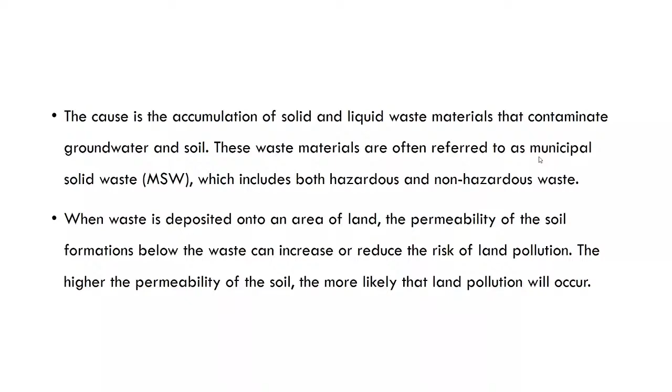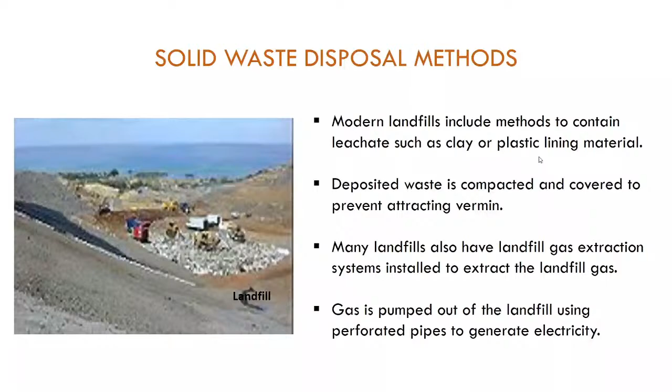Now, these are the different solid waste disposal methods which are normally adopted, polluting the land and disturbing the land features as well. One is the landfill, another is incineration, another is composting. All these three methods have their advantages, but disadvantages as well, provided they are not carried out in a technically sound manner, or not constructed in a properly designed way. Experience has shown that there is no completely safe method of waste disposal. All these forms of disposal have some negative effects on the environment, public health, and of course the local economies.

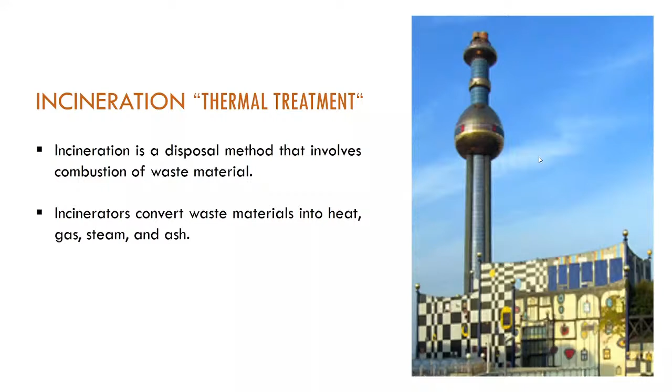Landfills have contaminated the drinking water. The garbage burned in incinerators is found to poison the air, soil, and water. The composting pits, if not made in a technically sound manner, leach into the groundwater, and contaminate the air as well. So, we need to adopt some pro-environmental practices to ensure environmental sustainability. For that, we may need to shift to renewable resources, limiting consumption of non-renewable resources. Then the environmental decisions or choices made must be of long-term consequences. Don't aim for short-term consequences or one which will fit one generation. Whatever decisions or choices are made should be beneficial for the generations to come as well.

Then, social welfare has to be targeted, not just economic welfare or the GDP, when economic and environmental choices and decisions are made. Then, the health of the ecosystem has to be protected by using products that minimize waste or are non-toxic. You can compost or anaerobically digest the biodegradable waste. You can reuse materials, either on-site, or materials could be collected and utilized for off-site recycling. So, what I mean to say is that we need to adopt different approaches for implementing environment-conscious practices that may prevent or reduce. I may not say 100% prevention. It may reduce the pollution load on the environment.

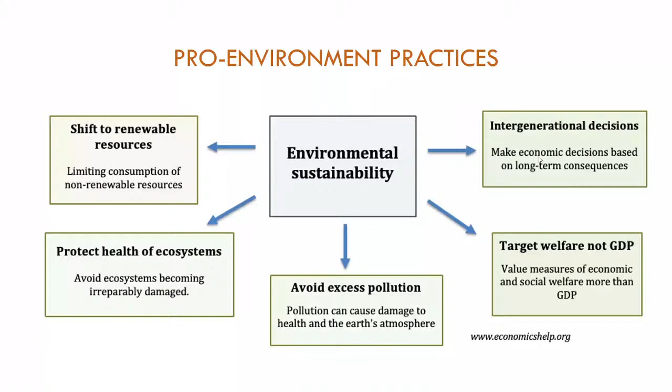The word fair is used when the product is actually serving the purpose it is intended for. Now, say for example, if you are buying sauce in a glass bottle, until the sauce is there, the bottle is serving its fair use. Now, once the sauce is finished, the bottle is a waste.

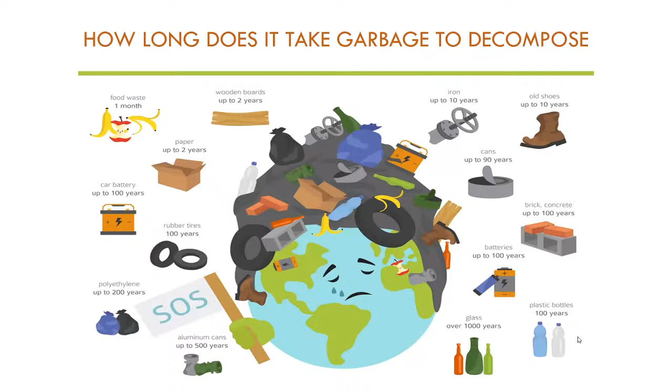And of course, at times, the research may not be fruitful because research, as they say, is just like exploring a black hole. At times, you may find the light at the end of the tunnel. Many times, you may not. But don't be disheartened. Try another path or the alternative and proceed.

At the individual level, there are many things we can do to reduce the contributions to land pollution. One of the simplest ways is, just as I have referred now, either you can reuse an item or recycle. If not for the fair use, you can put it to some other beneficial use.

And now, as civil engineers, as environmental engineers, as geotechnical engineers, if you are looking to make a difference on a community level, if you have to make some contributions to society as researchers, you can do many researches and become an environmental steward in your neighborhood.

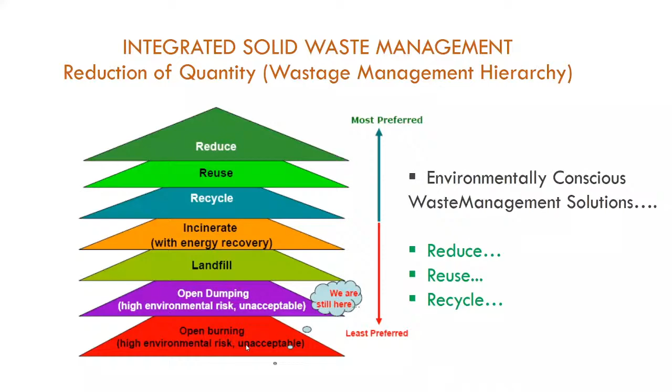Now, as civil engineers, you can achieve the reduction in waste during the different construction processes by ensuring maximum resource recovery and safe disposal of the waste so that the burden on the landfill is reduced. You can segregate the waste efficiently using different colored bins for collecting the different categories of waste from the construction process.

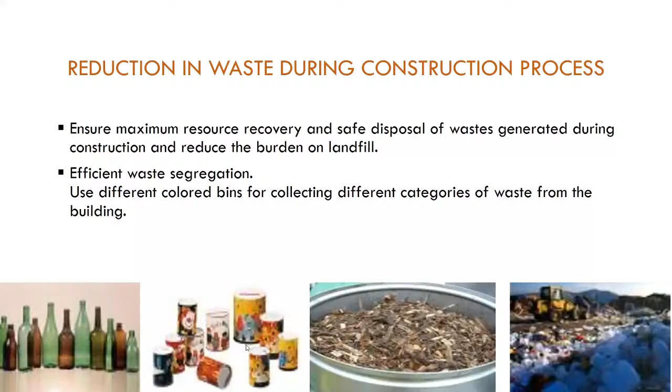So now I'm going to discuss some pro-environmental researches, certain glimpses from researches done by a few of my scholars in the PG program. See, I never force any specific topic on my project students or my scholars. Instead, I ask them to look around and come up with some issues around them that they feel are urgent to be sorted or essential to find a solution for.

So, if you look around, surely you will come up with issues that need attention, or rather immediate attention. Once you have identified the problem, the next step is to find the possible solutions. Whenever you go for the solutions, try as far as possible to end up with some feasible solution. Feasible solution means go for something which is indigenous so that the project or the research or the end result is economical in the long run.

So this is actually where the challenge is. If you go for some foreign material which is not available in your place all through the year, then how can you get the work implemented?

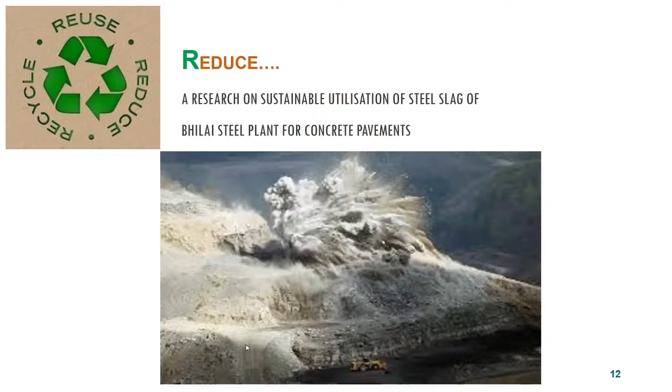The production of 1 ton of steel results in an average of 400 kilograms of byproducts. Just imagine the volume of byproducts formed, and these include not just slag, but dust as well as sludges and other materials. Nowadays, as industrialization has increased, steel production has increased multifold, and consequently higher volumes of waste are generated. The biggest problem is the land required for the disposal of the slag as well as the sludges.

So if the waste could be utilized, let it be the slag or the sludge, it can produce economic benefits, and provide a sustainable solution that allows the steel industry to achieve the target of zero waste. Those in BTech will understand what zero waste emission is. It means whatever emissions are produced within the industry, if it is possible to get those wastes recycled or reused within the industry itself or some other process, then you achieve the zero waste target, and you will be satisfying the environmental policies and legislations as well.

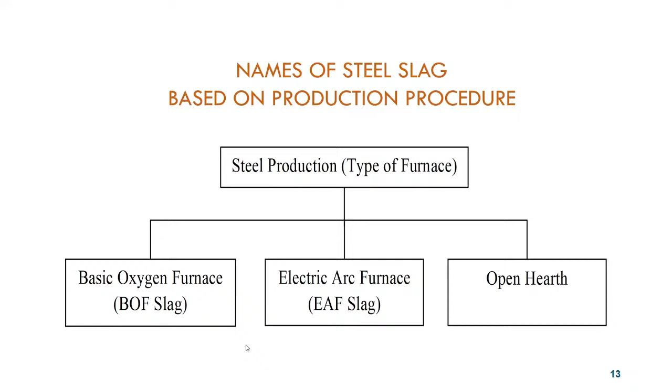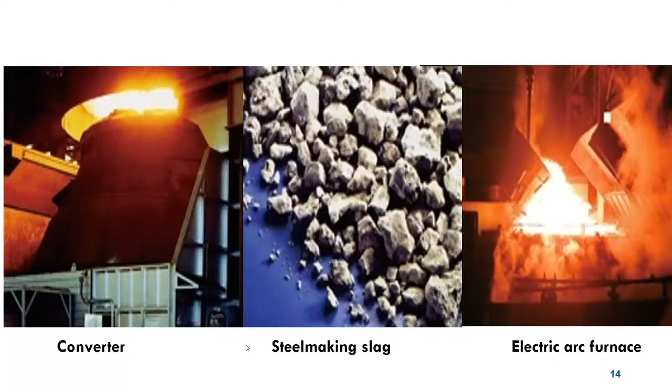So see here, the slag is generated as a byproduct in the production of a specific type of steel. You will have different types of slag from different processes like the basic oxygen furnace, electric arc furnace, and open hearth furnace; the nature and characteristics of the slag produced will be different. The slag available for our work was from the blast furnace, and a huge amount of iron and steel slag is dumped in the yards of each production unit, engaging important agricultural land and causing grave pollution to the whole environment, especially the land.

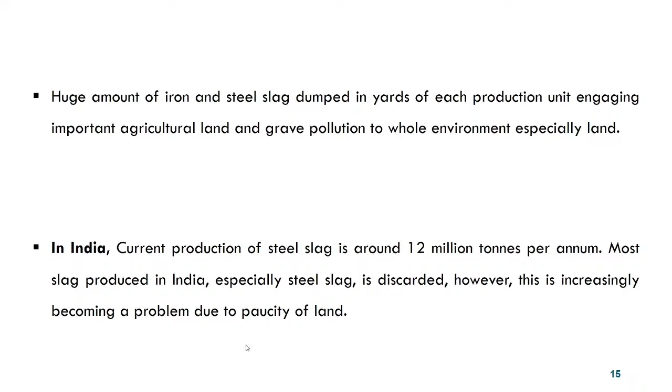In India, the current production of steel slag is around 12 million tons per annum, and most of it is discarded. Outside India, steel slag is used as aggregate for road construction, as rail ballast, for paver blocks and bricks, etc. So an efficient approach to overcome these problems is to utilize the available slag. For that, you need to know the physical and chemical characteristics of the steel slag to use it as road aggregates, cement and concrete admixture, etc.

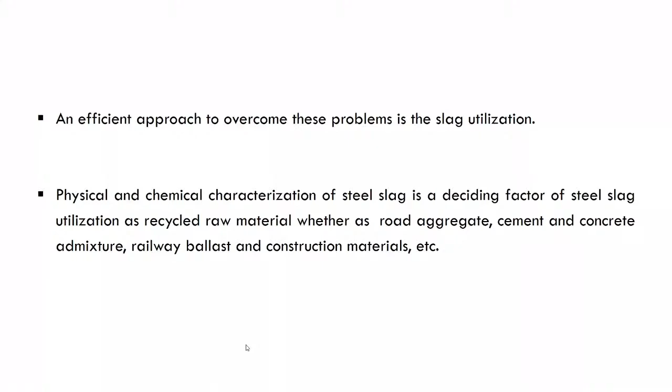The objective of the study was to find the applicability of steel slag. This is problem-specific research done to find the applicability of steel slag from the Bhilai steel plant and other similar steel plants, to solve the specific problem of slag management and disposal, thus saving the environment. You can see the Bhilai steel plant in the photograph here at the far end, and this is actually the dumped slag.

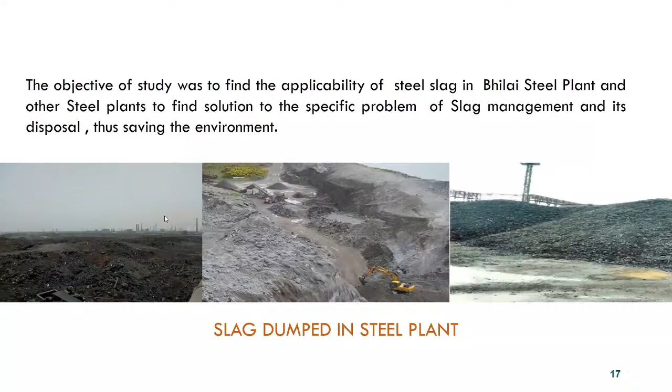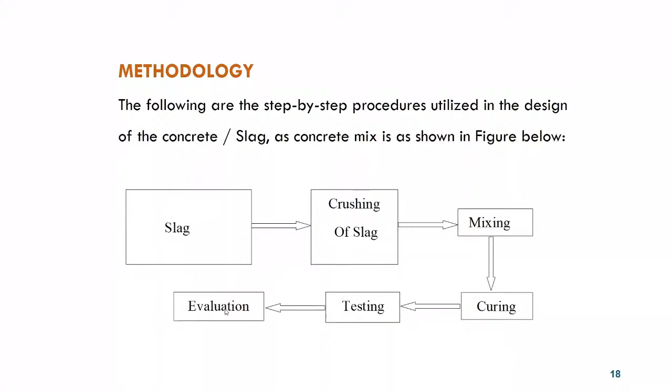The methodology adopted was procurement of the slag, crushing the slag to 20 mm size aggregate, proper mixing and proportioning of the slag with the regular constituents of concrete, curing the concrete blocks, and then testing and evaluation depending on the results. The mix proportion used was 1:1:2. We adopted the nominal M25 mix, and the water cement ratio was 0.5 by weight. I'm just summarizing the results.

The first was the standard specimen, where 0% slag was used and the aggregate was 100% coarse aggregate. Then 20% slag was introduced. The third step was 50% slag, and the fourth was the risky one, where 100% of the slag replaced the coarse aggregate, and the properties were analyzed.

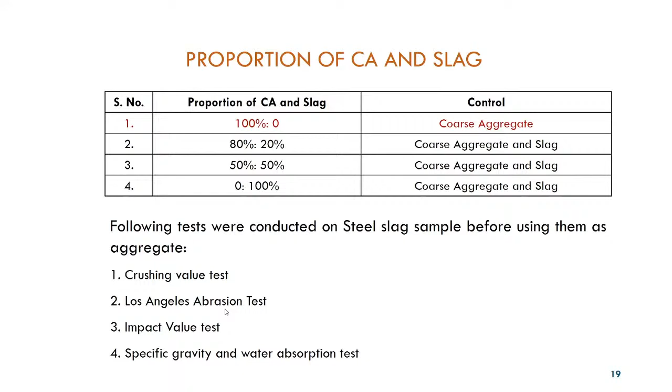Before casting the cubes, as I told you, the slag has to be tested for its appropriateness for the intended use. If it is proposed for concrete pavement, it has to prove its appropriateness, so the steel slag should be tested for the same parameters as aggregate. The tests done were crushing, Los Angeles abrasion, impact value, specific gravity and water absorption. Those specializing in the stream know these values better than me.

For the slag specimen, the crushing value was more than the normal aggregate. The specific gravity was within range at 2.93, water absorption was also fine, and the abrasion and impact of the slag specimen were much better than those of the natural aggregate.

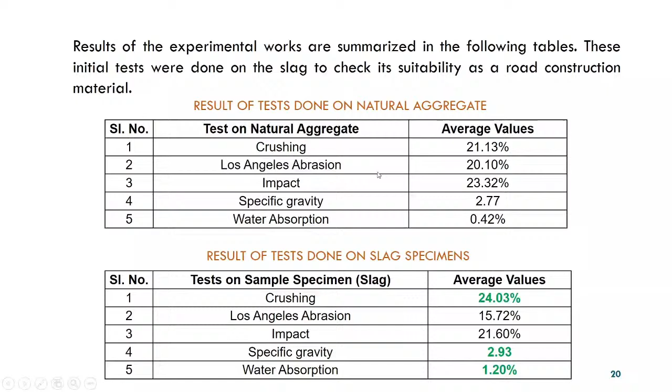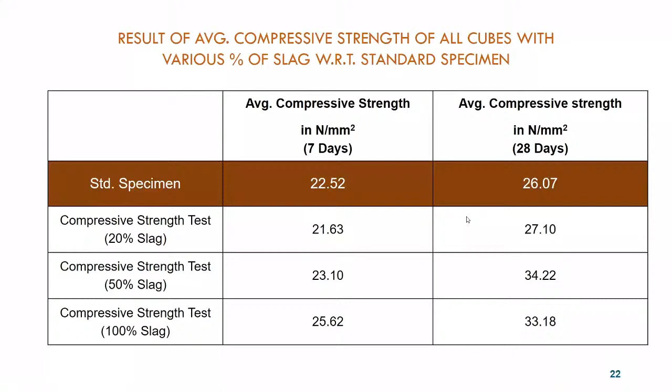Of course, the value was highest for the 50% replacement of the slag, but again, all these values are much above the value which is required for M25 mix. See, the concrete cube casted using slag as aggregate achieved strength much higher than the requirement of the design mix M25. The value was highest with 50% slag being used as a replacement to natural aggregate. Slightly decreased with the use of 100%, but still it is greater than the value which is required.

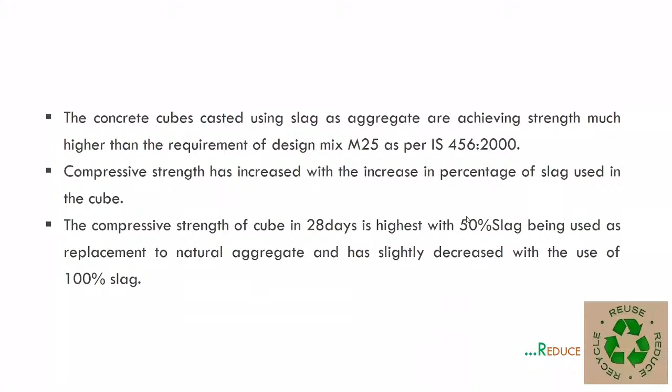So now for the next R, that is reuse. There is rapid pace of development in the world in various fields due to urbanization, industrialization, modernization, and infrastructure development. And all these are generating substantial volume of construction and demolition waste. See, even the building debris can be put to good use, like filling the potholes and laying the roads.

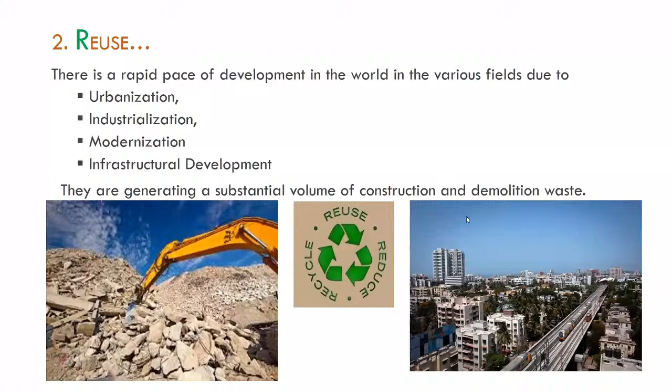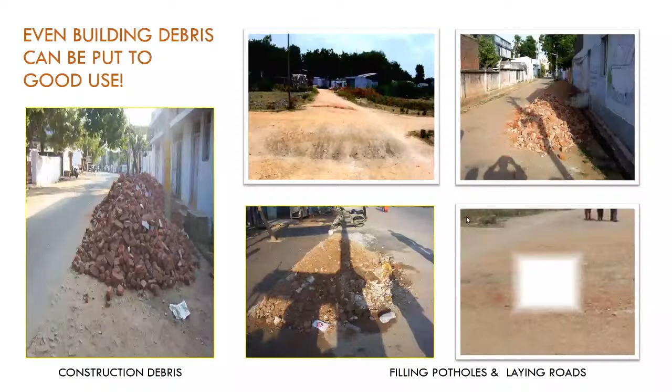Now, another scholar, as she was walking to the department from the parking lot, witnessed a heap of concrete waste and tile waste outside the lab premises. Actually, at that time one working platform of one lab was demolished and reconstructed, and all this waste was dumped along the side of the lab itself. So this is the second research we are going to discuss now, a project on the reuse of construction and demolition waste and rice husk for sustainable engineering. This scholar wanted to do something more than just construction waste. So that is where rice husk comes into the role.

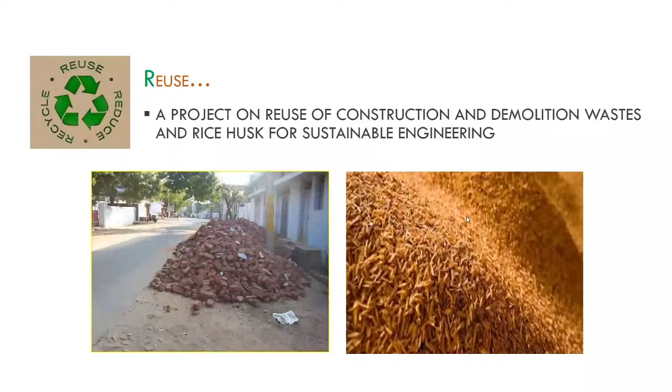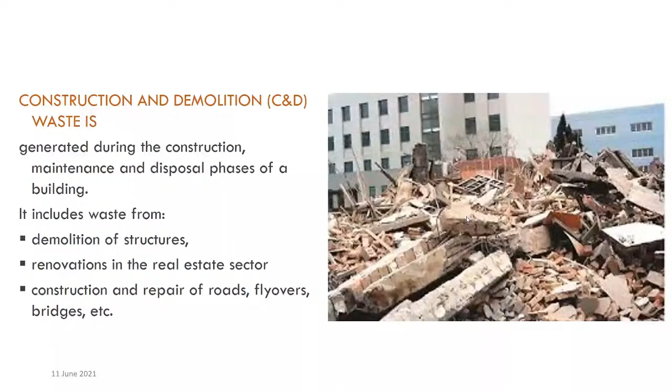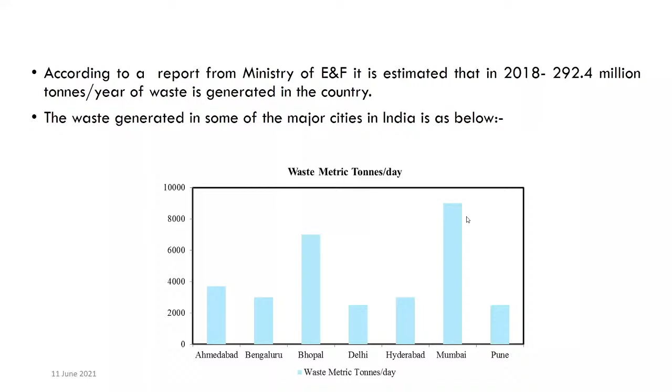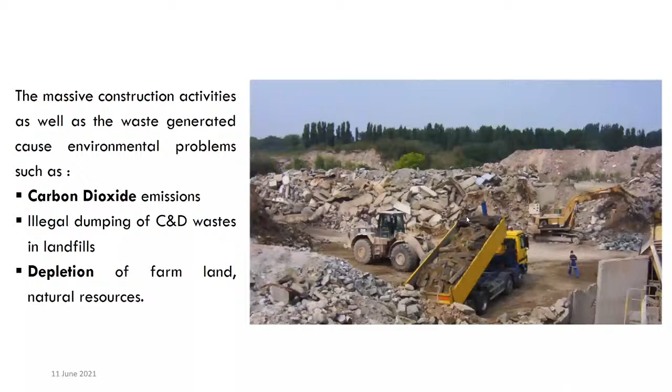The massive construction activities as well as the waste generated cause environmental problems such as carbon dioxide emissions, illegal dumping of construction and demolition waste in landfills, depletion of farmland and natural resources, and reduction in the value and availability of land as well. Now, as I have told you, the scholar wanted to do something more than just the analysis of construction waste, because similar projects have been done before. So, we looked out for some other waste that was a potential pollutant in our region.

Now, as many of you may know from your general knowledge, Chhattisgarh is called the rice bowl of central India. And we have about 20,000 varieties of rice here. And obviously, you can imagine the number of rice mills as well. There are so many rice mills here. In all these rice mills, the main process is the removal of rice from the husk, and the rice husk, which is the outer covering, comes out as a waste. Now, during the milling of paddy, about 78% is received as rice, whereas 22% of the weight is received as husk.

Now, in the rice mill itself, this rice husk is partially reused. They cannot use the complete rice husk, of course, but they may use it partially for the parboiling process. Now what comes out will be the ash. And this rice husk ash is a great environmental threat because it causes damage to the land wherever it is dumped in the surrounding area. So if this rice husk ash can be brought to some use in civil construction practices, if it is possible. So that initiated this research work.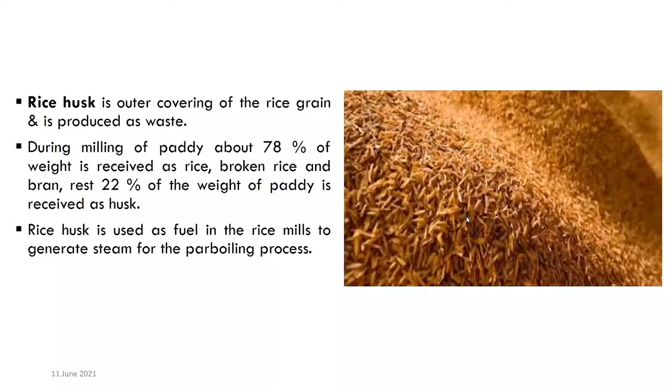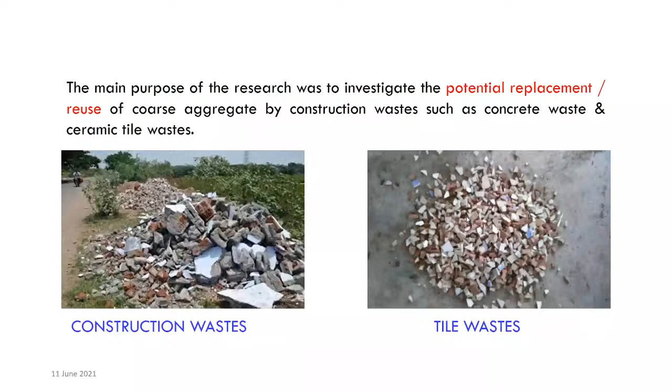The main purpose was to investigate the potential replacement or reuse of coarse aggregate by construction waste. What we had in hand was the concrete waste and the ceramic tile waste. Other part of the study involved the usage of ash received from rice husk. The research partially involved the partial replacement of cement by rice husk ash.

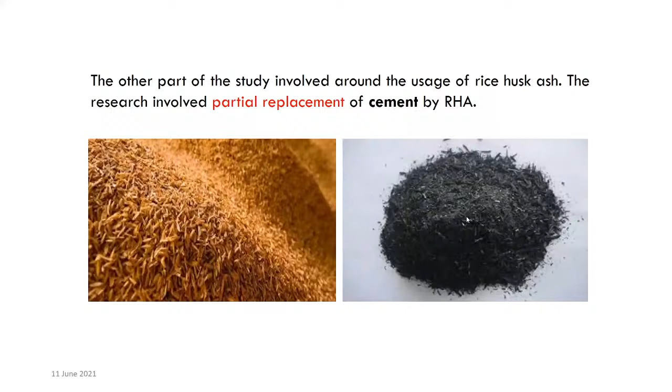The raw materials adopted were the 20mm coarse aggregate, the concrete waste and the ceramic tile waste, both broken to 20mm size, the rice husk ash, and water. The mix proportion adopted in this research was M15 mix, 1:2:4, with a water cement ratio of 0.5.

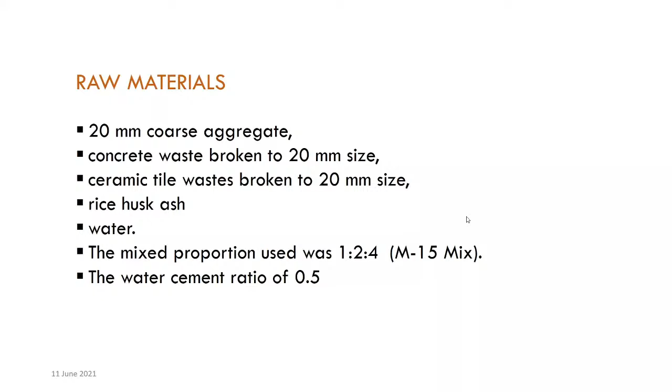This is the methodology of study done under 3 different heads. First was the standard specimen, where only cement and normal coarse aggregate was mixed. Second, 50% of the construction waste replacing the aggregate. Third, 100% of the construction waste, then 50% of the tile waste, and then 100% of the tile waste replacing the normal aggregate.

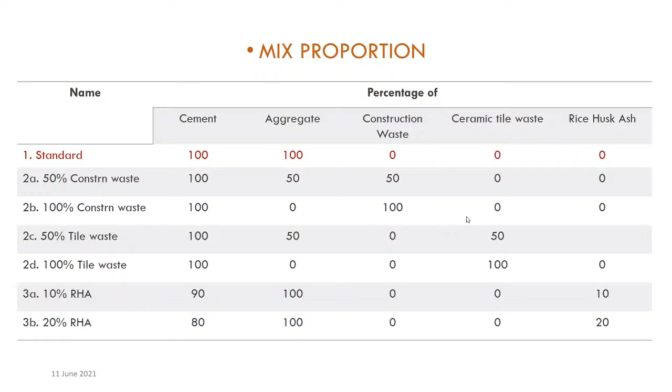The third part of the study was the replacement of 10% of rice husk ash with cement, and 20% of rice husk ash with cement. She got positive results until about 24% replacement of the ash with cement. But when she tried 30% replacement, it was not a success. So we stopped the research findings and the results at 20% only.

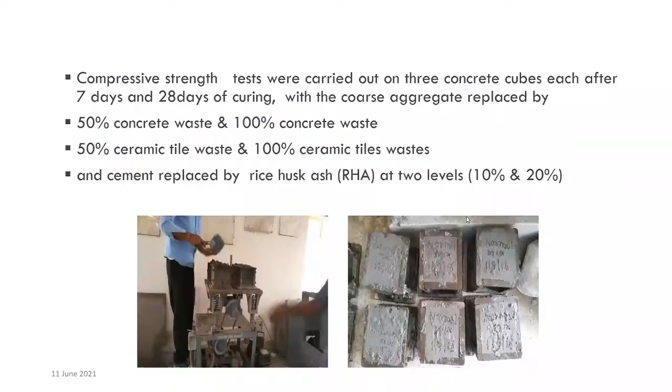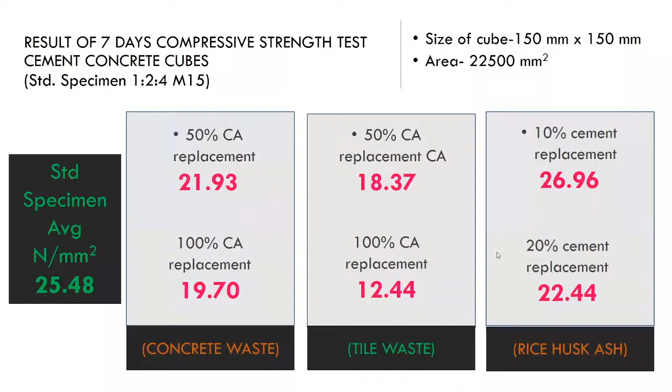Now with the replacement of rice husk ash, at 30% this was giving a lesser value, so we limited it up to 24 or 25%.

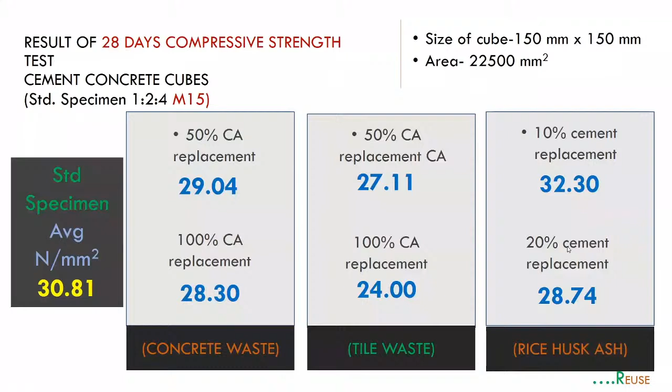Now for the third R of the 3R solid waste management hierarchy, which is recycle, drifting away from the first 2 cases, that is solid waste disposal on land.

Now I'll be discussing something which is my specialization, wastewater engineering. This is the topic on wastewater recycling. This scholar is working in PHED, Public Health Engineering Department, and he wanted to do something with regard to the saving of water. Saving of water means especially the grey water which is just disposed or made to run to join the drain, if it is possible to recycle that grey water. So that was the thought which led to this particular study.

So I am slightly drifting away from solid waste disposal on land. Now, in this 3R concept for recycle, I will be talking about the recycle of grey water, especially the kitchen wastewater used in our homes. Recycling can prevent the waste of potentially useful materials and reduce the consumption of fresh raw material.

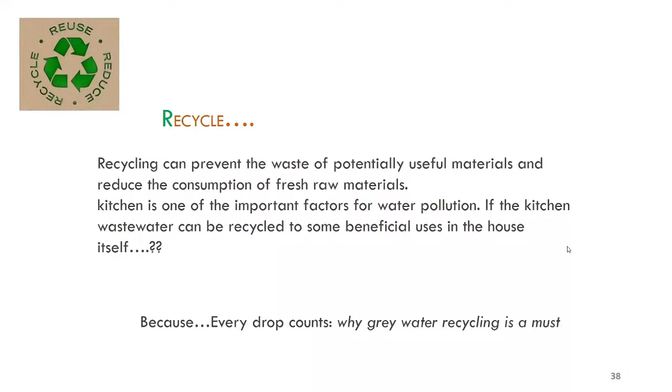It is actually rather unfortunate that the concept is not common in a water starved country like India. Sitting in Trivandrum, you may not understand what actual water starvation is. Fortunately for me, the place where I live, I've never faced water starvation, but there are different places in India, especially North India, which are water starved, where the availability of drinking water is very less. So this was the spark that led to the research work, and I'm going to discuss it with you.

Recycling of the kitchen wastewater by phytoremediation. Phytoremediation is the name given to a set of technologies that use plants to clean contaminated sites. In this project, the term phytoremediation refers to a set of plant-contaminant interactions.

As you all know, for the MTech, the maximum time available for research work is 1 year, and in this 1 year, he has done research for about 8 to 10 months. In this concept of phytoremediation, long-term objective field evaluation is essential to understand how well the phytoremediation may work and what the real cost of application will be. You have to build models to predict the interaction between the plants and the contaminants. So this 8 to 10 month work is what I am putting before you.

He has now started his PhD research also under me, so maybe we will be getting a better and clearer vision of what exactly the result will be in the next 3 to 4 years.

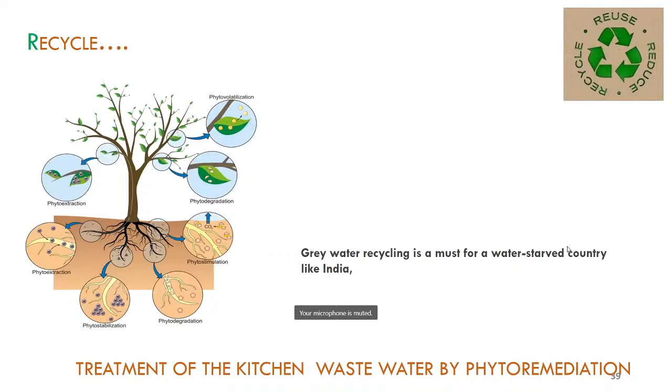Phytoremediation is a technology that uses various plants to degrade organic matter present in the water. Some plants extract the degradable material from the wastewater and contain it in their body parts, be it the roots, stem, branch, leaf, or sometimes fruits. Some plants immobilize the contaminants, not letting them move from one place to another, from the soil and water. Of course, toxic heavy metals may not be degraded by plants, so that's the reason we focused on the organic pollutant, the organic wastewater from the kitchen, as our subject of research.

The most commonly used growth media in phytoremediation is gravel or soil. Gravel filters are effective in removing suspended solids from contaminated water, but less effective in removing dissolved nutrients. So the sand and gravel layer removes bacteria as well as small particles from the wastewater.

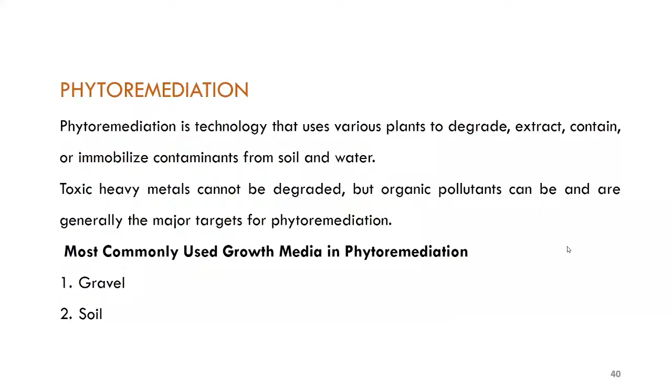This is the experimental setup which he constructed at his home. First, the kitchen wastewater, or the larger floating solids in it, was filtered, and the kitchen wastewater was lifted manually over here to this tank, which you can call a tank or a tub. The filtered wastewater was filled in the tub and then made to flow.

Depending on the velocity, he controlled it using a peristaltic pump, so the water was made to flow from the top down to the two experimentation tanks or tubs. In the first tub, gravel was placed, and in the second, sand was placed along with a macrophyte used in the filter media. The raw water at this tank was tested for parameters, and the water at the outlet after the second tank was analyzed.

This effluent was analyzed for removal efficiency. Whatever parameters were tested for removal efficiency, the inlet parameter was measured from here and the outlet parameters were measured from the effluent collected over here. Now water automatically passes from this tub to the first one, then filters down to the second one, and the effluent is collected from here.

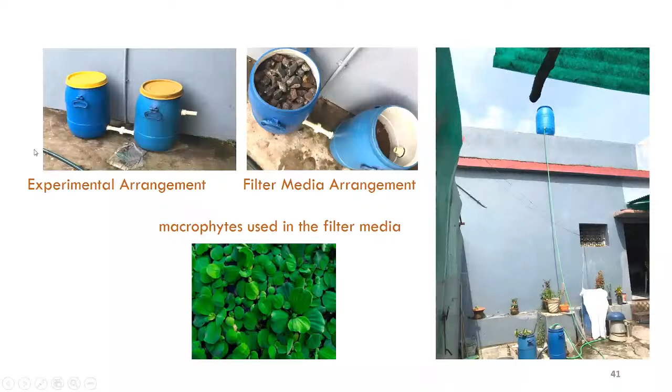Now the macrophytes in the second tub are grown. Macrophytes have a significant effect as they slow down the water flow and trap the pollutants in their stems and roots. The macrophyte used was water lettuce. Water lettuce, or water cabbage, is capable of removing nutrients and heavy metals from contaminated water bodies.

The young plants, the macrophytes, were growing out somewhere on the pond. But the main thing is that these plants have to be acclimatized with the water we are treating. For that, young plants of water lettuce were collected from the local area and immediately transported to his house, then rinsed with borewell water.

In his house, the common usage was not from the municipal supply water, it was from the borewell itself. Over here, in every house we have these two connections. We all have borewells at our individual homes as well. So in his house, the major usage was from the borewell.

So this macrophyte has to be acclimatized to the water in which it is treated. For that, about 3 to 5 days these macrophytes were placed in a tub containing the borewell water under sun. After around 3 to 5 days, these plants got adapted to the water into which they were to be treated, and then he replaced it into the filter medium for phytoremediation experiments.

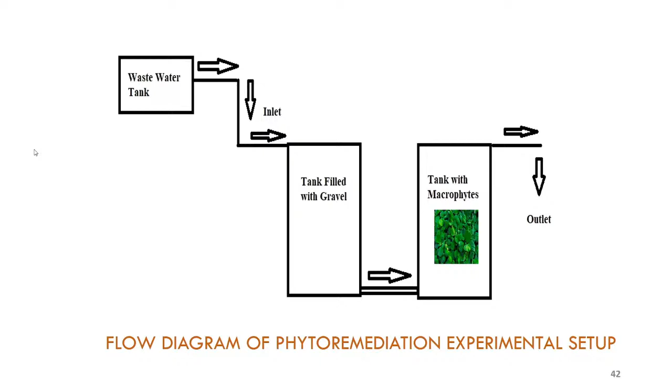The first study was for the treatment of kitchen wastewater using the macrophyte. The efficacy of the macrophytes was tested. This is just a small table, but it is the result of extensive research work done over around 10 months for the PG project. This is the average result of the sample I am putting before you.

The inlet sample, the kitchen wastewater, was somehow a bit acidic, and BOD, total dissolved solids, and suspended solids were the parameters tested. There are some more parameters, but I am putting before you only these four, which are considered to be the crux of the efficiency, along with the outlet sample.

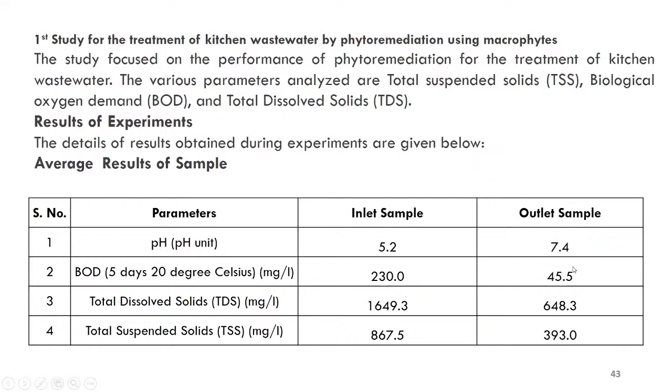Now the second part of the study was the analysis of kitchen wastewater. The same wastewater was made to stand in the filter media for different hydraulic retention times. Hydraulic retention time is the average residence time for the fluid particles if provided steady state outflow conditions. So the water is made to stand still in the pond, or at a very small velocity. The hydraulic retention time was managed for 6 hours, 24 hours, and 48 hours.

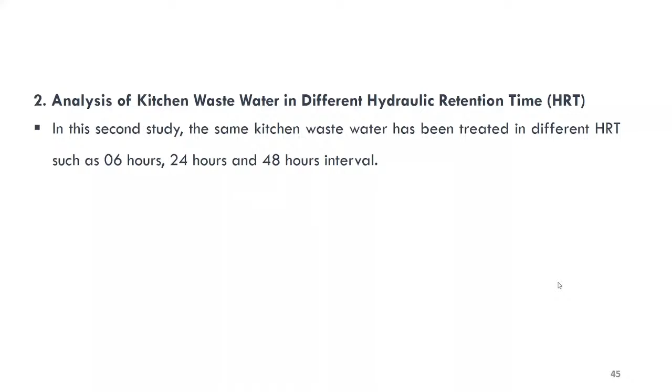Again, the efficiency of particle removal was analyzed - pH of the inlet sample, BOD, total dissolved solids, and suspended solids. In his findings, we could see that removal efficiency increased as the value of hydraulic retention time increased from 6 hours to 48 hours.

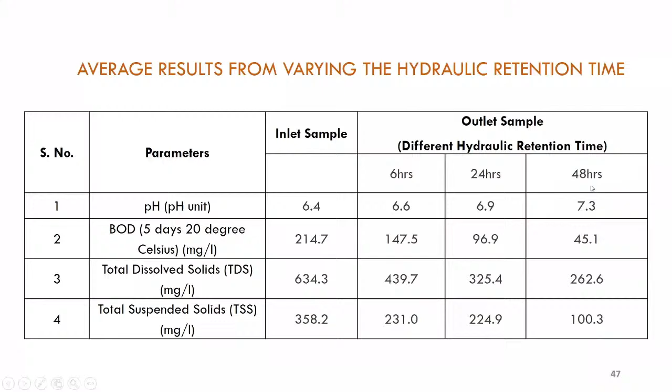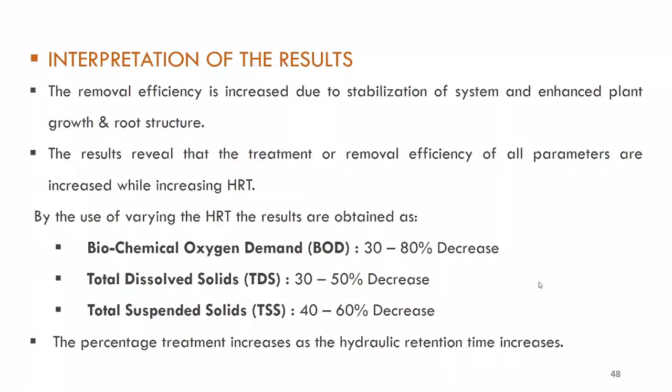So in 48 hours, you could get considerable removal efficiency of about 30 to 80% of BOD removed. Total dissolved solids value is a bit lesser, because dissolved solids removal was only about 30 to maximum 50%, and the suspended solid removal is about 40 to 60%.

Now the third part was the analysis of the same water by introducing different plant species. If you Google plants best for phytoremediation, it will give you a list and tell you that broadleaf plants are good for phytoremediation. The selection of the plant should be based on pollutant tolerance potential - the plant should bear the load of the pollutant, have oxygen carrying capacity, and of course removal efficiency, because that is what we are aiming for.

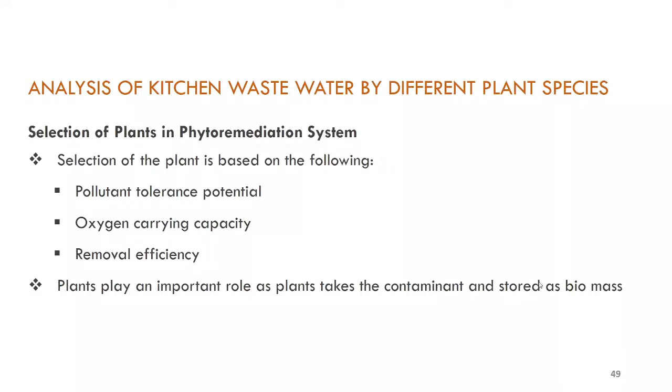Again, repeating what I told you a few minutes ago, whenever you are doing research, as far as possible try to adopt indigenous raw materials available to you year-round. You have to think of solutions feasible in the region where you are, in the area of the country or the world where you are.

So, water hyacinth and sunflower. Among the list of different plants we got from Google, we selected two plants, water hyacinth and sunflower, because these two plants are plentifully available and very easy to grow. Water hyacinth you can find everywhere - in Kerala its availability is too much. Same here, as well as sunflower. These were the two plants selected for phytoremediation.

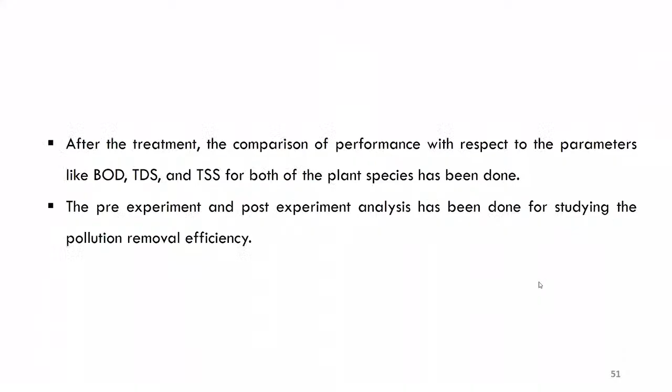What was done is he constructed two beds, in one water hyacinth was grown, in the other sunflower was grown, and water was slowly sprinkled over the water hyacinth bed, with the effluent collected using a set of under-drains. It's not so easy as I say - water infiltrating down through the soil and collection of effluent is a bit of a difficult task. You have to adjust the velocity as well. Anyhow, that's a part of the research work.

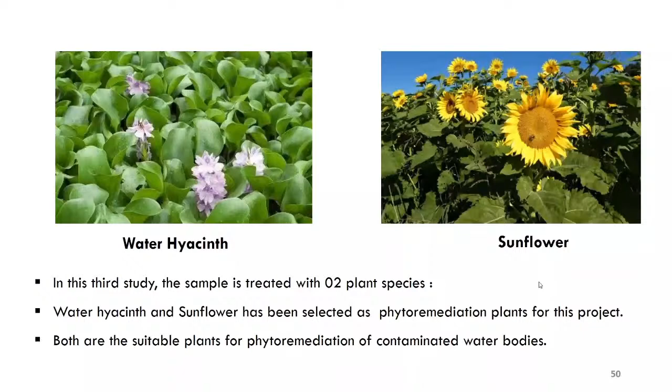From the hyacinth bed and from the sunflower bed, the effluent was collected and checked for the efficacy of the removal. Now see here, this is the average results of phytoremediation on different plants. Just have a look at this table. I cannot tell you a clear-cut differentiation of which one is superior over the other. I cannot say that water hyacinth is superior over sunflower or vice versa, because as you can see, the BOD reduction is more by water hyacinth, whereas the total dissolved solids and the suspended solids removal was better by the sunflower, or rather from the sunflower bed.

So that is why I told you much extensive study is required to find out which one is efficient. Again, I can say that the selection of the plant and the adaptability of the plant can be based on the type of the water which is to be treated and the intended level of purity which is required. So of course we are involved in a long-term and extensive study, and for now, both the plants were good in the removal of some specific characteristic. Here, BOD was removed by the water hyacinth, with considerable differences. And for the total solids and the suspended solids, the sunflower proved to be a better one.

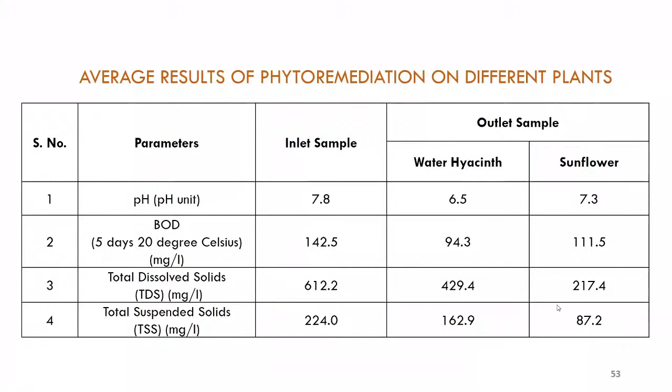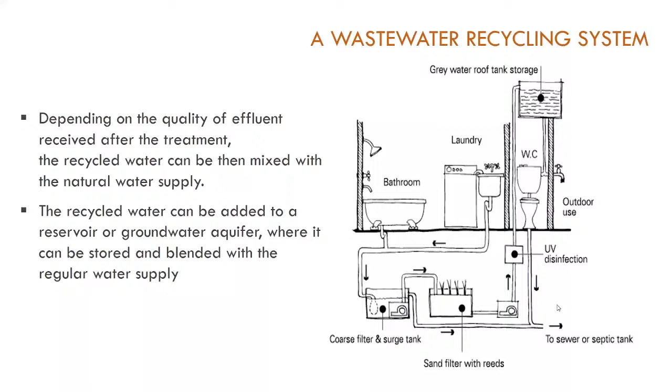So, depending on the quality of the effluent which you receive after the treatment, meaning the level of purity achieved after phytoremediation, the recycled water can be mixed with the natural water supply or added to a reservoir or a groundwater aquifer, or it can be stored and blended with the regular water supply depending on the purity. And since in the water which he received, I think BOD was around 45 milligram per liter, he used the water for his rooftop gardening.

So the water can be very well used. Where we live, in summer, especially this particular summer month, there was very scorching heat, and we need to water the plants in the balcony at least twice. So just imagine the amount of water which is running for this purpose. Again, it is potable drinking water which has been treated up to the drinking water quality standards, right? So if you can recycle the used water, spent water, let it be the grey water only, then it will be a very good conservation of the drinking water you are saving.

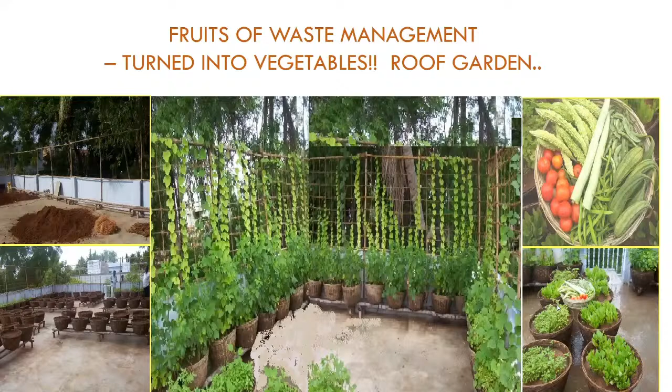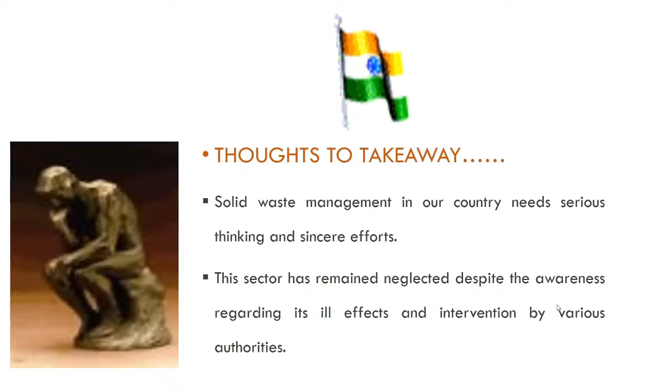So now, to end my technical session, some thoughts to take away. Solid waste management in our country needs serious thinking and sincere efforts. The sector has remained neglected despite the awareness regarding its ill effects and intervention by various authorities. You have so many conferences, STPs, faculty development programs being conducted for solid waste management, but I say very few are implemented. If you happen to travel by road across the different cities of the country, you can see how pathetic the situation of solid waste management is. Today, not only the country, but the entire world needs to conserve energy to fulfill its needs and offer a quality life.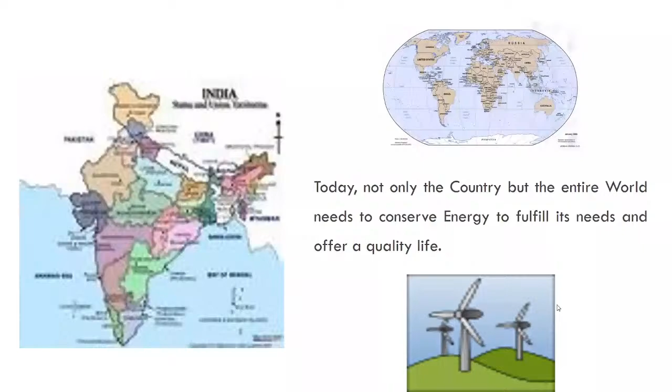My dear students, you are the next generation of planners, builders, and designers, and you hold the key for the better future. Take the challenges, grab the opportunities coming your way, keep learning, keep updated on new technologies, because technologies get revised and updated in a matter of, say, 5 years or so, and have a very bright future. Let us all work towards the sustainability goal with matching efforts. The sustainable engineering journey, sustaining our mother nature, is a journey, not a destination, and there are no shortcuts.